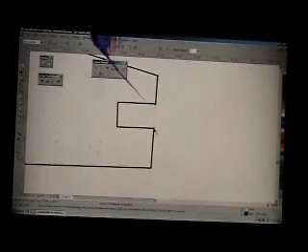So when you do that on your edges, let's come up here and see what that one looks like. That one's giving us the same thing. Zoom in on it, grab this little node, bring it over to this one. Boom, see? Just fixed it now. It's a nice symmetrical edge.

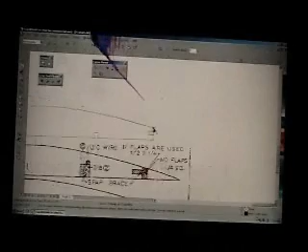See if we got another one of those going on. You gotta check all your corners, make sure they're good, because the laser will put that in there. See what this one looks like. Yep, got that same thing going. We're just gonna connect these little nodes and it'll fix it. Bam.

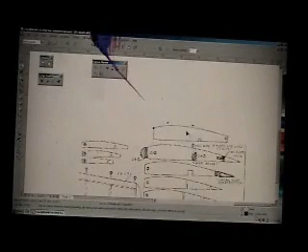So there's your quick trace of a rib. You take that file and you go up to, when you save it, you can save as. Now it gives you all these file types. Gosh, there's about 40 of them. But you have DGW or DWG AutoCAD file and a DXF AutoCAD.

And then you can convert them. If you save it to a Corel Draw or an Adobe file, you can switch it and make it whatever file you want. And you can email that file over to Plasticare, $60 an hour, they'll run the machine. You do all the computer work. You're gonna save $60 an hour.

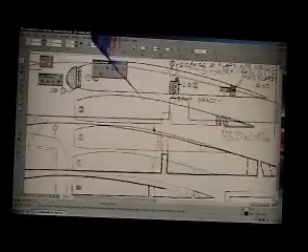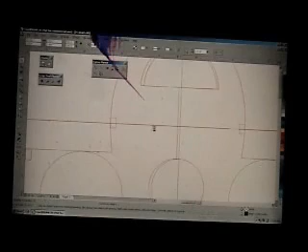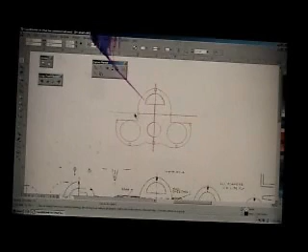So, and then as I'm making these ones, this was a rough one. You can see how everything's kind of out of whack here. So to avoid that, you want to draw one side at a time, one side only, and you start by drawing two square lines so that they're square with each other, horizontal and vertical, and then you trace just the one side of it, and then once you get that done, you take and copy it and flip it, and then when you slide it over you can line it all up and it works good.

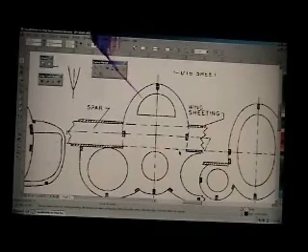This was a practice run and it didn't come out the best, but that was because when I made this I didn't use these square lines as I traced. You draw those two square lines, and then you come down here and rotate your image to match their square lines. So once you got your two lined up with their two, you come around and just trace the one side, and then you do all the edit work, so you don't have to edit it on both sides. You just do the one, copy, flip it, lay it over, and you got two sides that are the same. You only have to edit one side and trace one side, so it saves some time to do it like that.

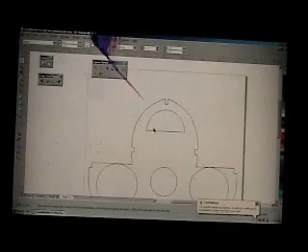So that's what we got there, guys. See, I got some other files that are done. I'll show you, I guess, former number 6. There's number 6, the one that we were looking at, and that one is done, same one that we were looking at, but this one was a redo. And then we come down, show you another one. What was that, 5? I'll show you 6. Oh, I just showed you 6.

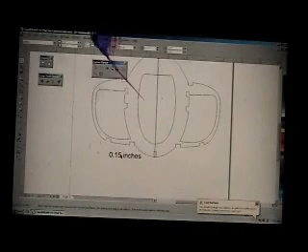I'll show you 5. Former number 5, there's number 5. And then it's got the measuring tool, so when I made all my rectangles, all these rectangles are exactly the same size.

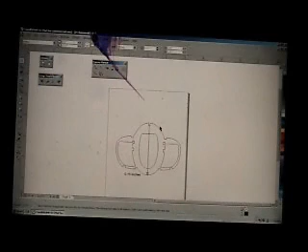So there's that, that's what I'm doing. I got most of the wing ribs done, I got most of the formers, I just got about 4 more to make, and then I'll place them all on an 18 by 36 working area, and I could take it down to Plasticare and have them cut it. I might do that, or I might try to use my laser, but it's going to take me a little while to learn how to run my table and stuff, so I might just go ahead and pay the $60 and go to Plasticare with these files and have them cut it out for me.

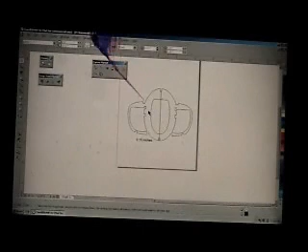So that's that. If you guys want to make your own CNC program for ribs, that's how you do it. And we'll catch you next time.